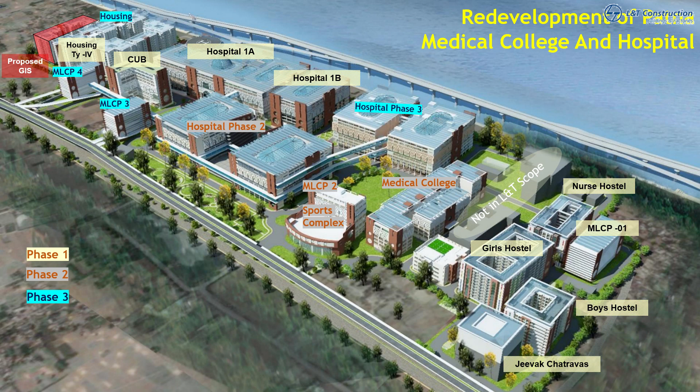The redevelopment of Patna Medical College and Hospital is an EPC project with a built-up area of 7.8 million square feet. The project scope includes the construction of a 5,462-bed hospital, a medical college, and associated facilities. This redevelopment project faces the unique challenge of maintaining all existing facilities of PMCH fully functional.

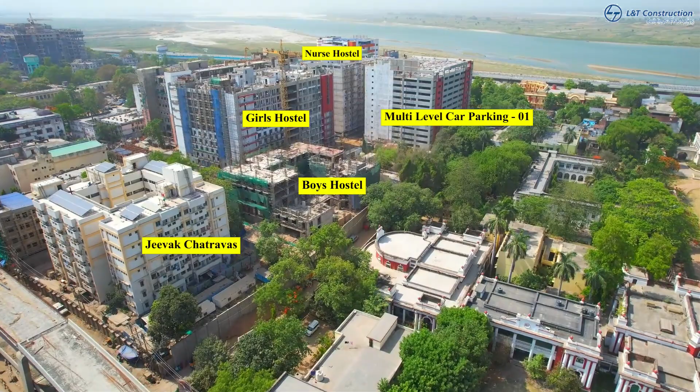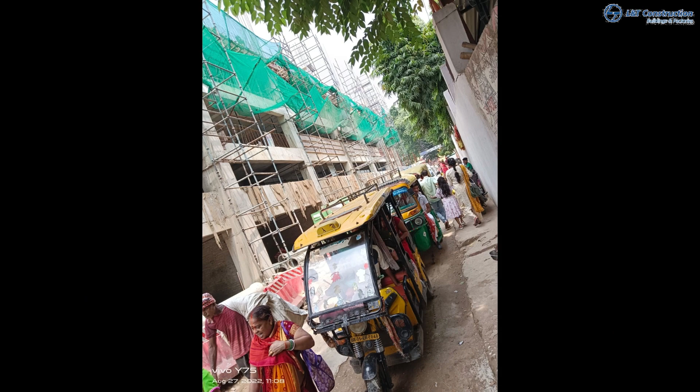PMCH is one of the biggest hospitals with heavy medical traffic, along with students residing within the campus, thereby making this campus extremely congested for traffic movement. There are numerous temples, more than 20, and 4 river ghats adjacent to the Pious Ganga, with access through the PMCH campus. On special occasions, pilgrims frequently commute through the campus to offer their prayers, which makes the movement of

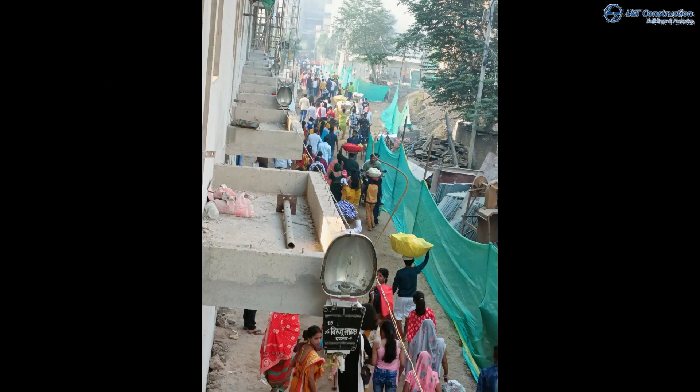construction equipment difficult. The roads within the campus are very narrow, hence it's very challenging to manage the logistics for this type of mega construction. Rerouting existing services throughout the campus is challenging as no drawings are available for the same. Due to space constraints, temporary infrastructure facilities are developed outside the campus, around 17 kilometers from the project site.

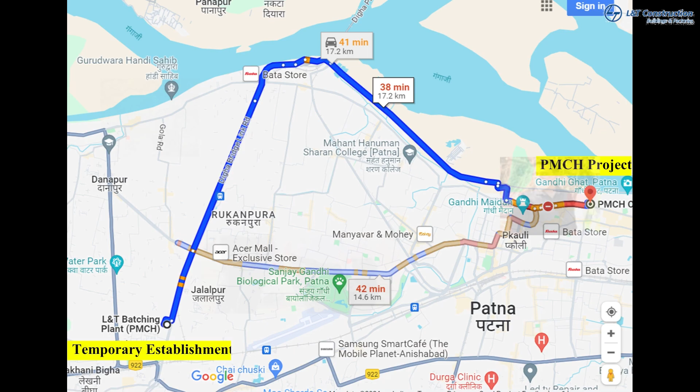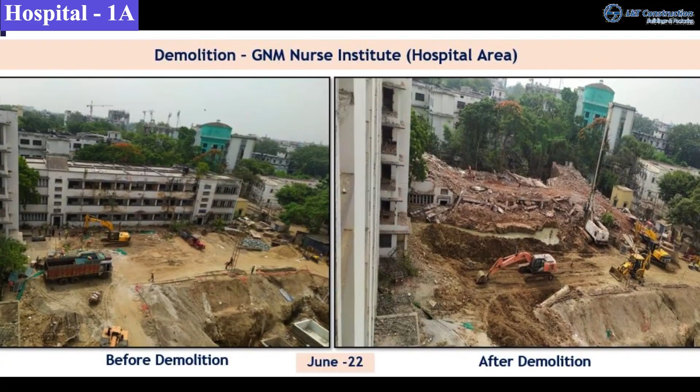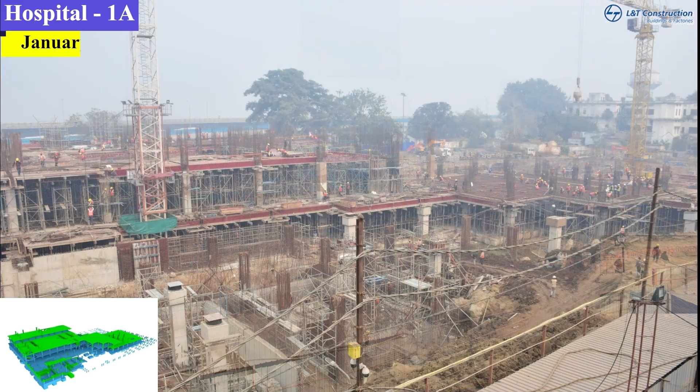The entire redevelopment will be executed in 3 phases. Phase 1 of the hospital block consists of 1494 beds. The area has been handed over in 7 stages. However, construction work has continued progressively as per the available front. The building has reached up to the terrace level in major areas at Tower 1 and Tower 2.

At the STP area, foundation work started in February 2023 after concluding the alternate route for LMO vehicles. In Misri Ghat area, construction activity started in January 2024. Sequential finishing and MEP activities are in progress in Tower 1 and Tower 2.

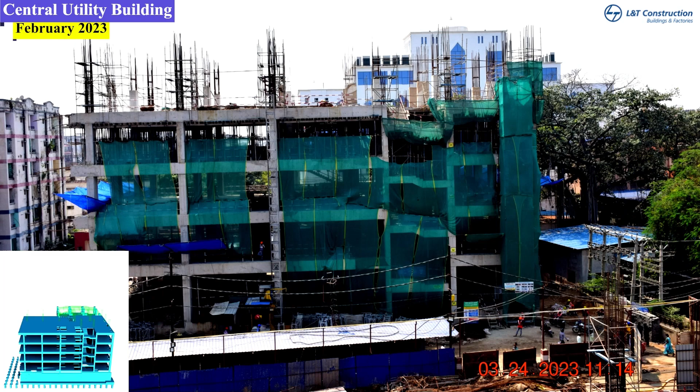A central utility block is proposed to cater to utility services for the hospital, with facilities such as a laundry, blood bank, central kitchen, parking, and night shelter facilities for 750 attendants. Finishing and MEP work have been completed up to the 5th floor. The decision has been made to temporarily relocate the OPD to the 1st, 3rd, and 4th floors, and the medical surgical store to the ground floor.

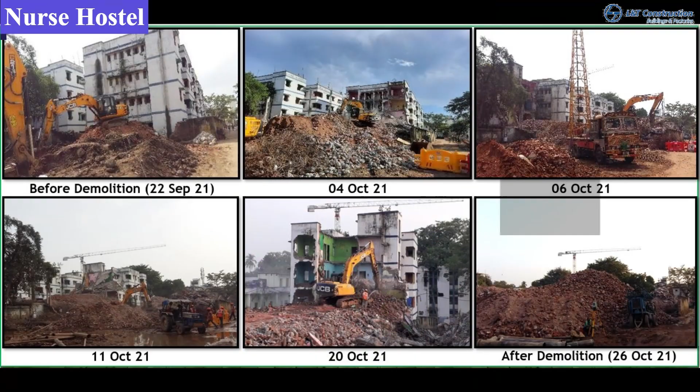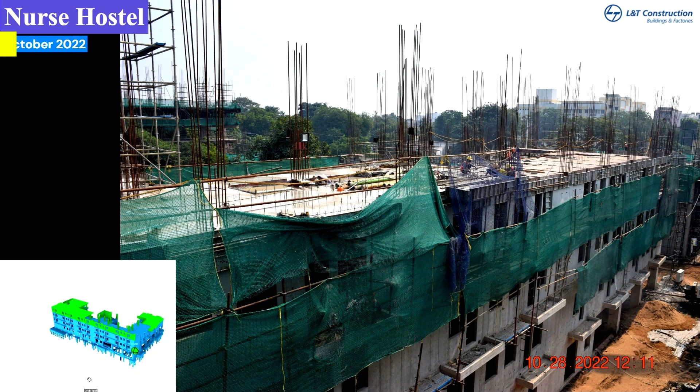The nurses' hostel aims to accommodate 550 working nurses on campus. The entire footprint has been handed over in 4 stages. By September 2021, we had acquired 60% of the footprint progressively. Construction activity started in the remaining footprint once the existing central dispensary was shifted in September 2022. Now, major civil finishing and MEP works have been completed in this building.

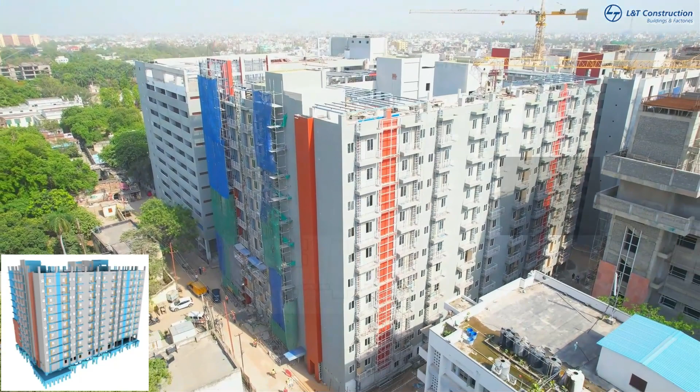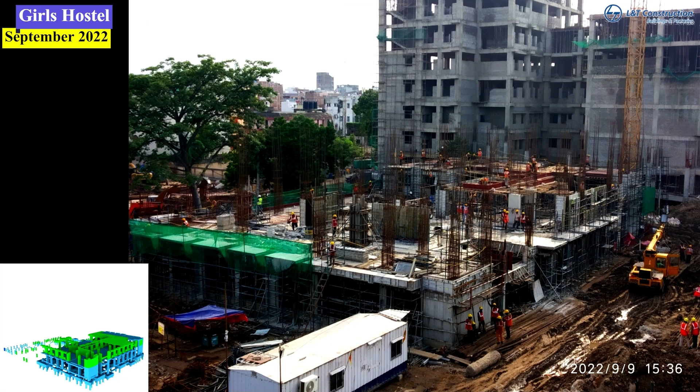The girls' hostel shall provide accommodation for 800 medical students. The entire girls' hostel footprint has been handed over in 3 stages. Part A finishing and MEP work have been majorly completed, while in Part B, structural activity has been completed. Sequential finishing and MEP activities are in progress.

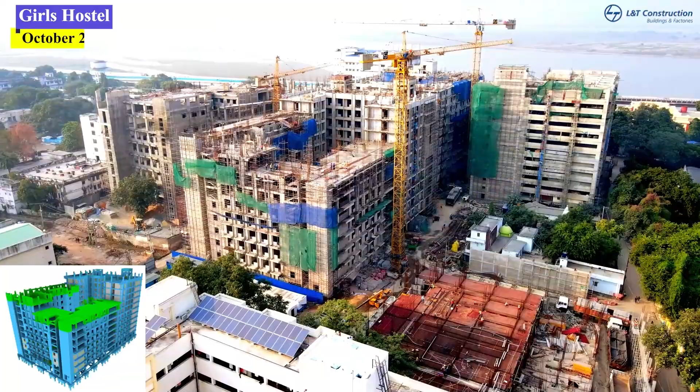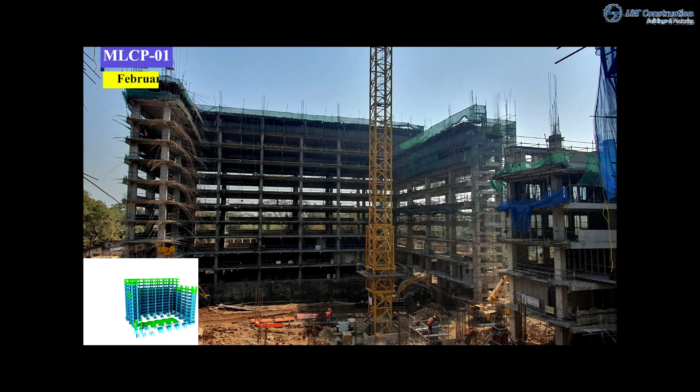A multi-level car parking, MLCP-01, block is proposed to cater to the parking requirements of the campus for 715 cars. The entire footprint has been handed over in 5 stages. By September 2021, 61% of the footprint had been handed over. Construction also started in the balance footprint after the shifting of the existing central dispensary. And now major work has been completed in this building.